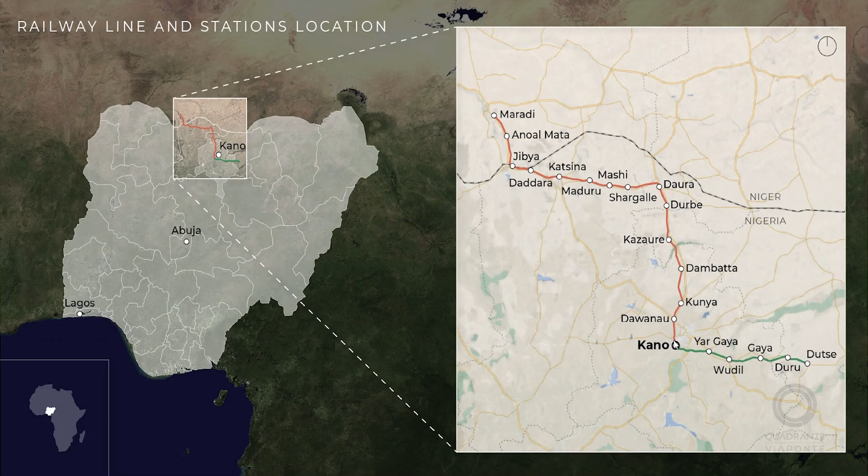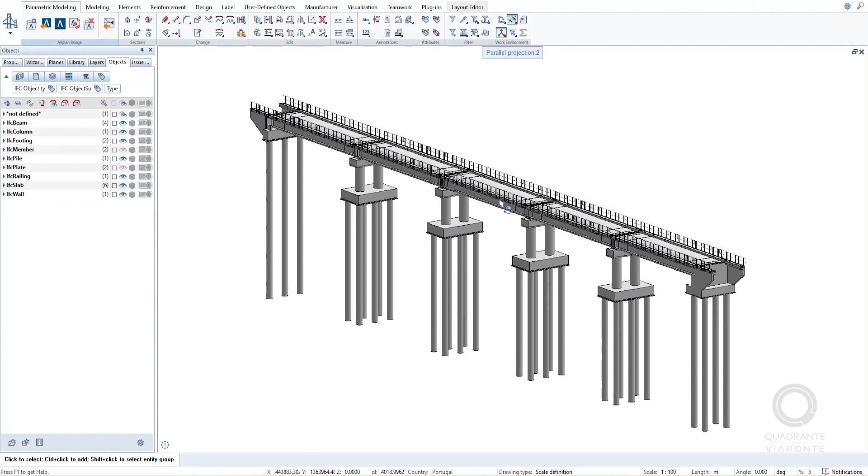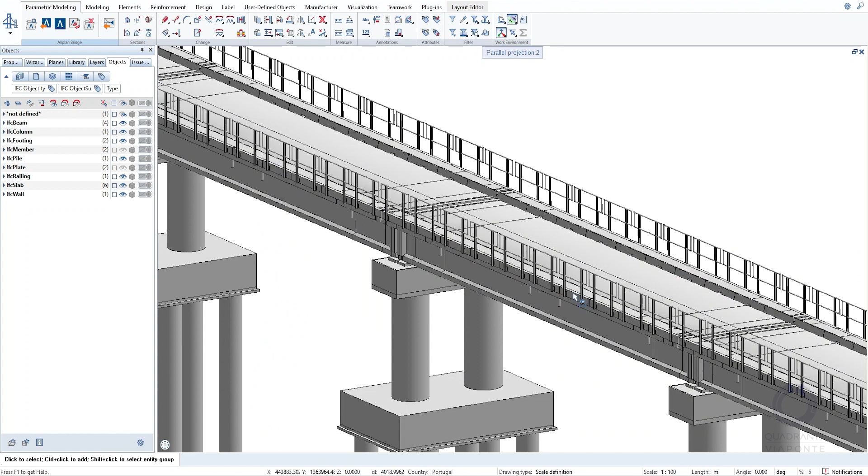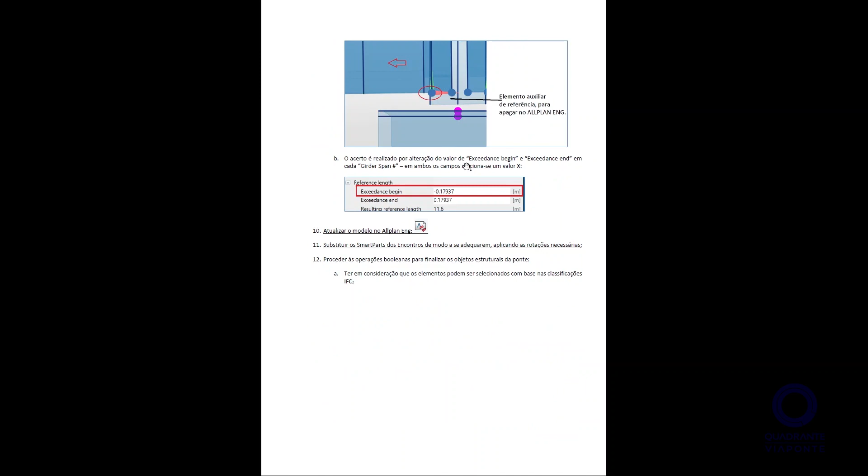In terms of the bridge, we are talking about a girder deck with prefabricated beams with prestressed tendons. The spans are simply supported. The slab deck is concreted over a prefabricated slab. So at the end, the functioning of the deck also comprises the slab, which is explained along a 4 or 5 page manual that allows for the transformation of our template to the final bridge.

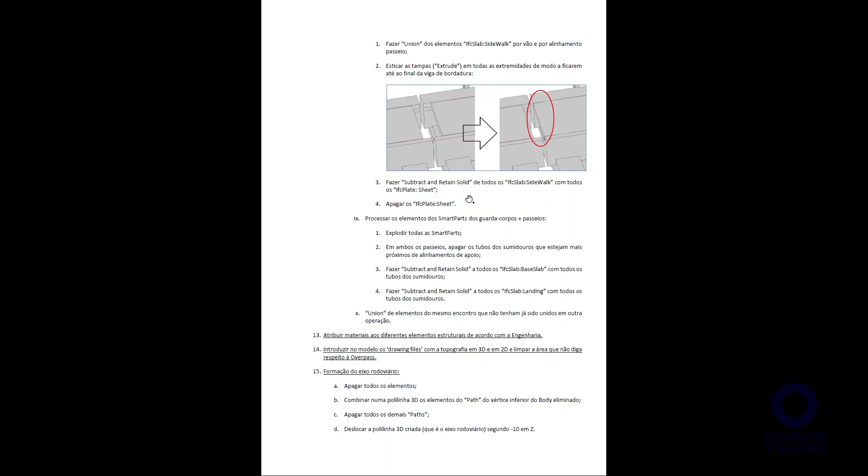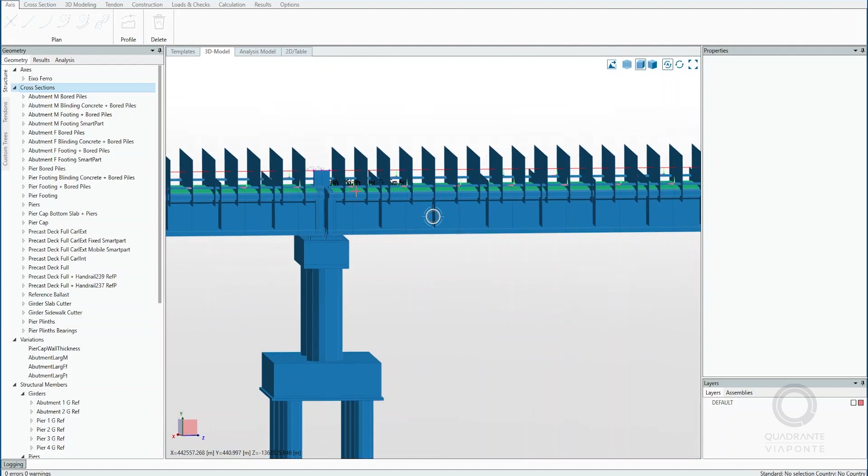So let's go to the bridge and try to look with more detail at how we produce this. When I open Allplan Bridge, what I see is this - this is a finished bridge. Here you can see some elements that were not present in the final Allplan Engineering, these are these vertical laminar elements. These vertical elements are in fact used to produce Boolean operations to construct the joints between the prefabricated slab elements and the elements for the lids on the sidewalks, and that's the reason.

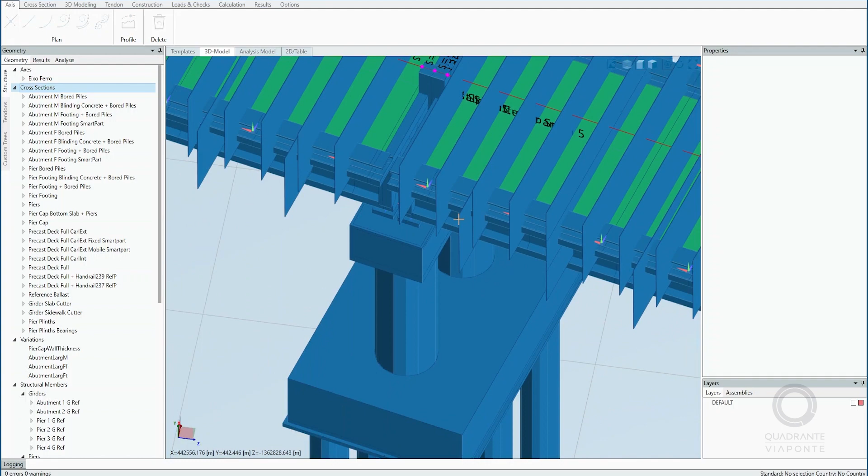Also, we have secondary elements that I will explain in a little bit, but I just wanted to start and clarify why there's a difference in image between this model and the previous one that I showed in the Allplan Engineering.

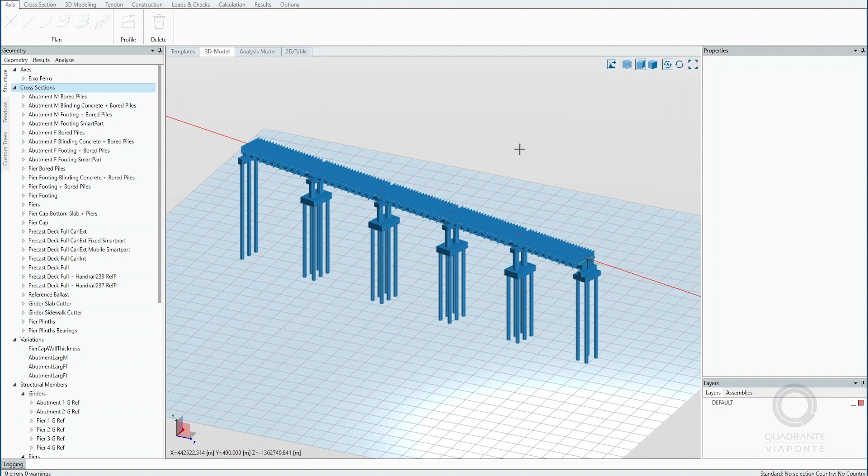The railway axis was imported from BIM Plus using the LandXML, of course, and then we have all the necessary cross sections that were produced, and they are defined in the template that originated this bridge. We need all these reference lines to produce this drawing, this cross section.

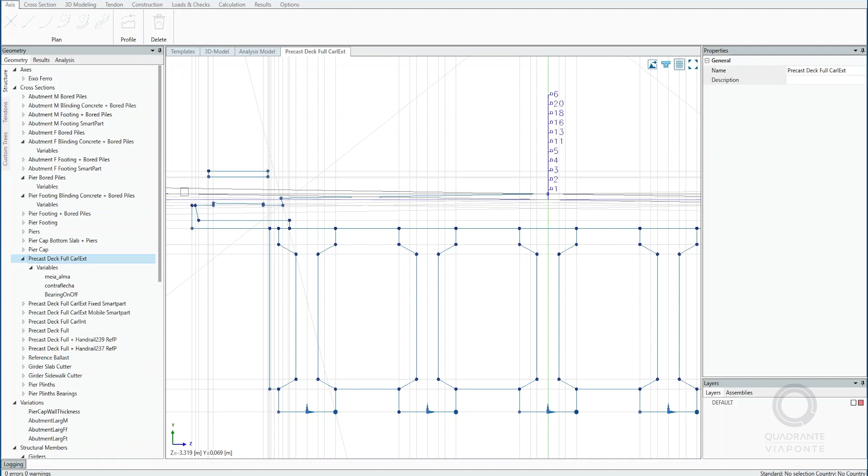We have the lid on the sidewalks, that at the end is scattered by Boolean operations with those laminar elements that we previously saw. We have reference points for the position of the rail for the pedestrians, and also for a small prefabricated element that is positioned here.

We have different cross sections along the deck because of the extremities of the deck, because there is a slight difference of 10, 20, 15 centimeters, and that is modeled. Also, we have a transverse beam at the end of the deck to improve the solidarity of the different prefabricated beams. The difference between the other cross section, it's not complex.

In this case, it's a cross section that is used to position the handrail. Here we can see the reference point. It was not present in the other cross section for the deck.

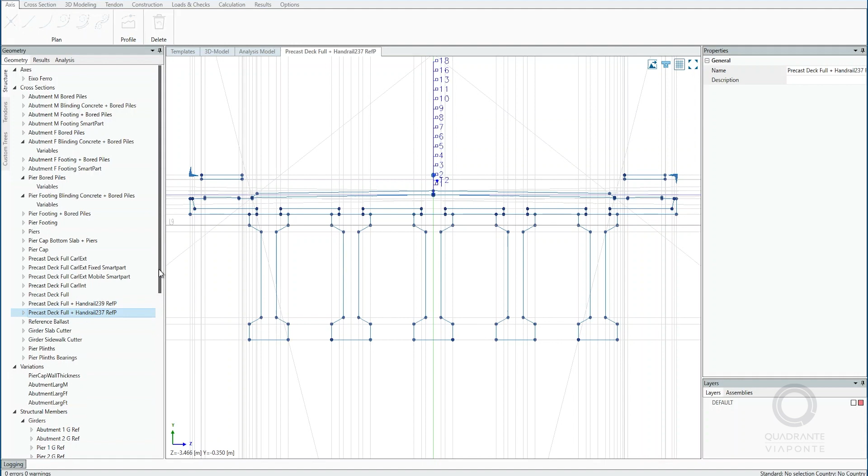There are two different kinds of handrails with different lengths, and so you have to have the two different cross sections. In terms of the 3D model, we have girders, piers, and link girders. The piers, the expected information. There is one pier for each support.

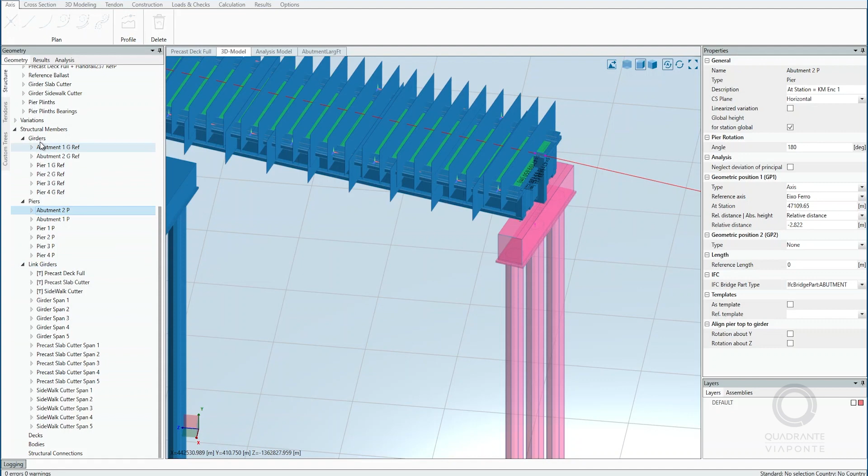The abutments also are produced in this way, and then the other elements of the abutment are introduced by a smart part positioned at a reference point. The deck is in reality produced by link girders, but a link girder has to start at a reference point and end at a reference point. And so the reference points are introduced using girder elements that are connected to the main axis of the bridge.

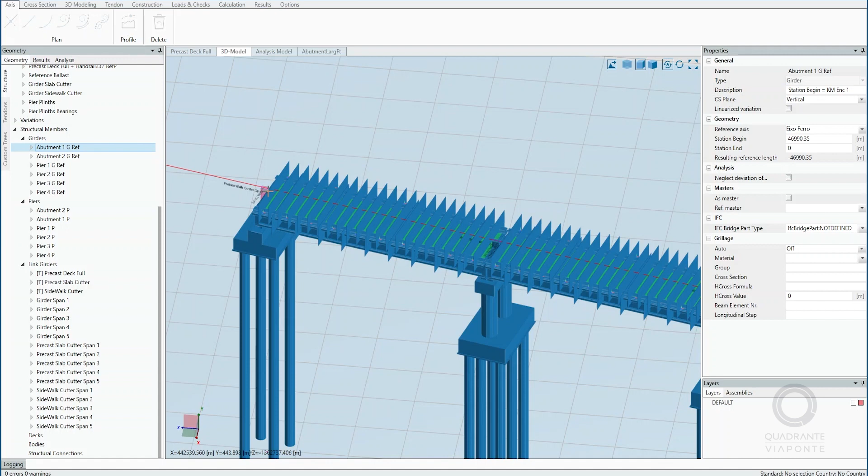So that's this element. This element you use to introduce the start reference point of this span. Then the other element here produces the final reference point for this span and the start point of the second span, and so on. With this, we produce the reference points to introduce the link girders.

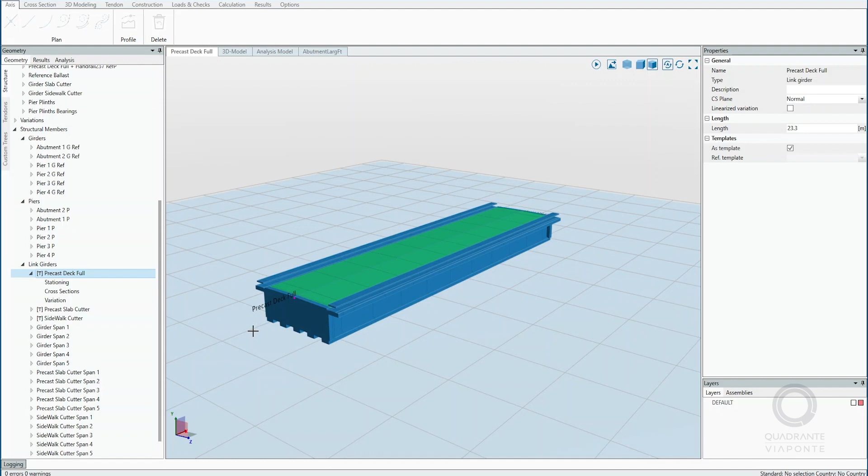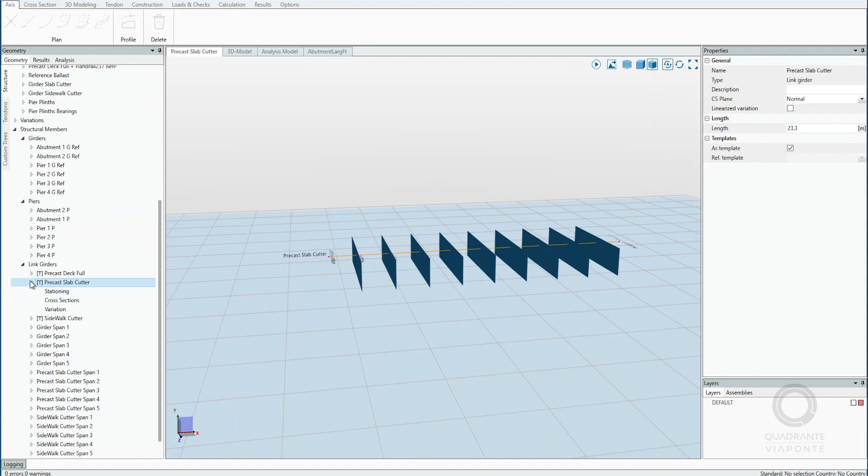We have a template for the precast deck in full with every element, okay? And we also have a link girder for the slab cutters, what we call the laminar elements, to introduce a Boolean operation of 1 centimeter and to create the joints between the prefabricated elements. Okay, and also this one for the sidewalks, the lids of the sidewalks.

With this, at the end, when we are seeing the model, we are talking of 3 independent link girders for each span. It's not complex to implement, especially when we start using, for example, this is a 5-span bridge. Okay, we can even more speedily change this to other kilometers to transform this into another bridge, because it's only a question of changing the kilometers of the piers and of the girders, and everything adapts.

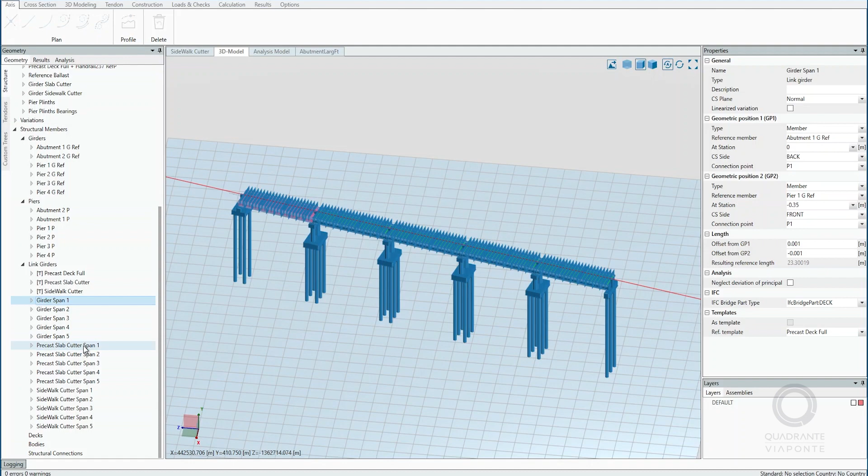So we have the girder for each span, the deck here 1 to 5, and the cutters 1 to 5, and then 1 to 5. There are things that have to be manually adjusted because of the distribution of the girder deck in each span. With this, we produce what we see here, and then from here we extract the 2D drawings for each bridge.

As I said, the process is optimized in order to minimize the specific drawings for each bridge. We have only 3 or 4 general geometry drawings for each bridge that show the bridge in its full length, and the details for the piers and the foundations are from drawings that are uniform for all the bridges, and that have a parameterization in terms of elevation for a foundation, in terms of height for a column, and things like that.

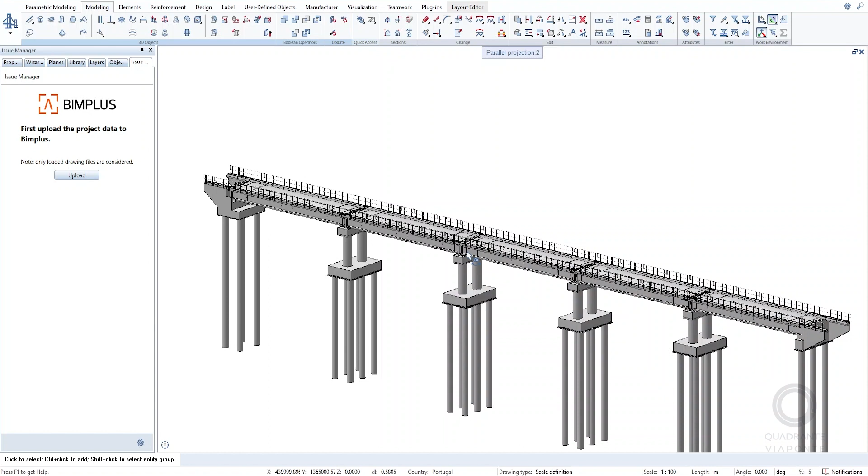Just to finish, I would like to show this 1 kilometer railway bridge. We started doing this bridge using a template with a small number of spans, and then using the addition of the TCL file, we quickly added more spans using the previously defined spans and inserting some lines in the TCL, and at the end we produced this bridge completed and rigorously defined in a matter of 2 hours.

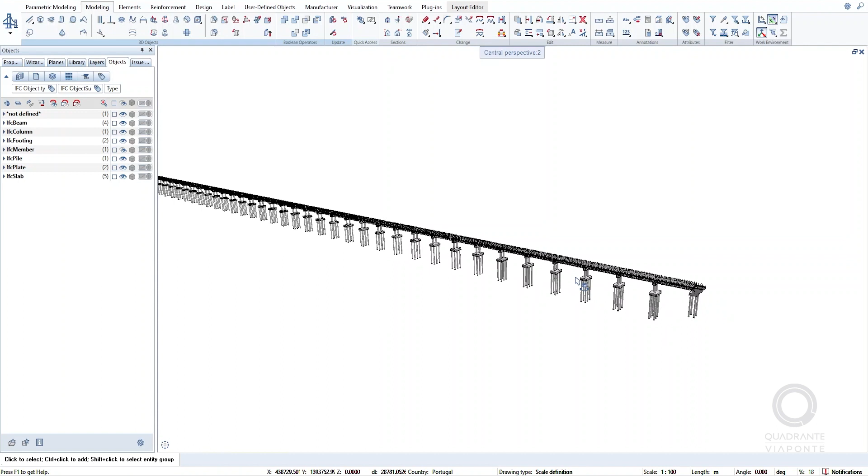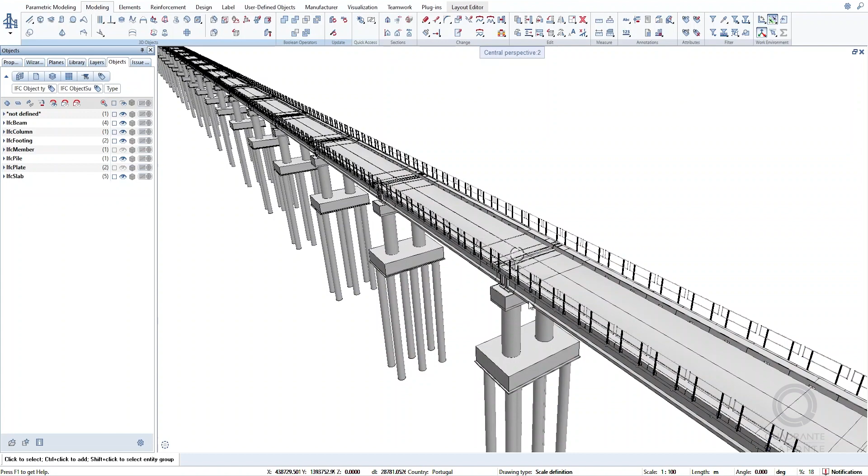We can see here the laminar elements that are used to cut. They can be disconnected because they have a specific IFC classification, and also the other elements we used, the girders we used to implement the reference points for the bridge deck, can be quickly disconnected and hidden. So this is how we produce a railway bridge with 1 kilometer in about 2 hours.

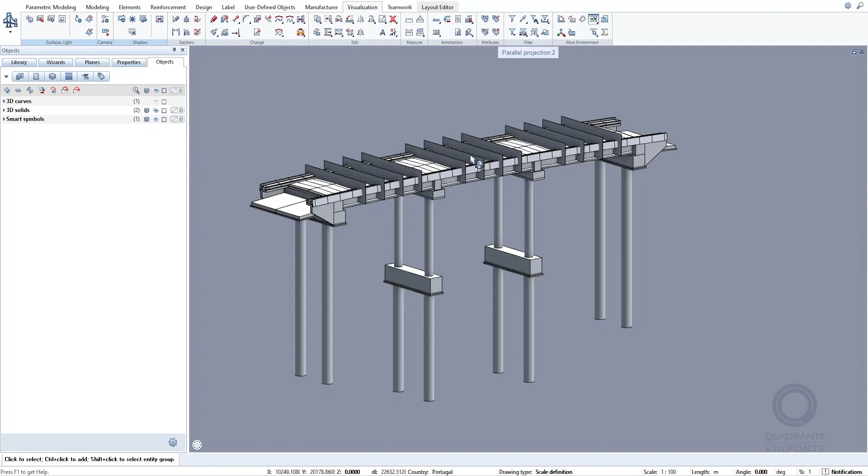I will show you now the overpasses. So this is the template for an overpass. The overpasses are in 95% of the cases with 3 spans. The deck is continuous along the 3 spans and is supported by prefabricated I-shaped beams.

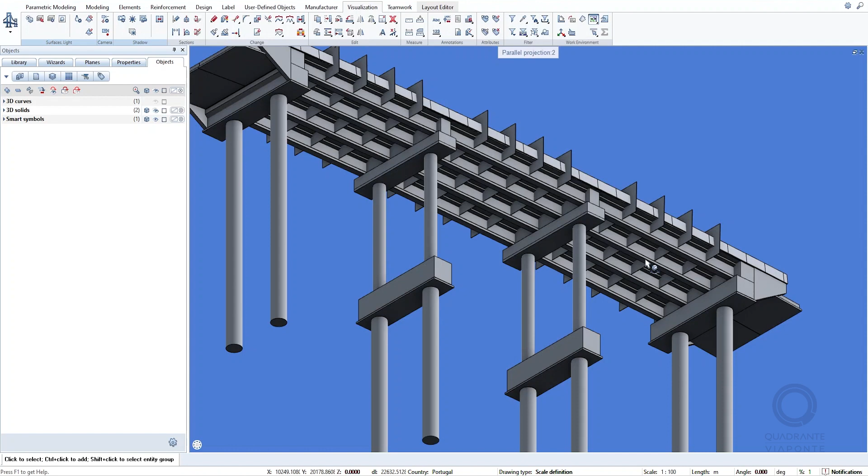There's a prefabricated slab that works as a formwork for the pouring of the concrete of the final slab deck, that allows for an integral functioning of all the elements of the deck. In this case, we don't have bearings. The beams rest directly on the pier caps and on the abutments.

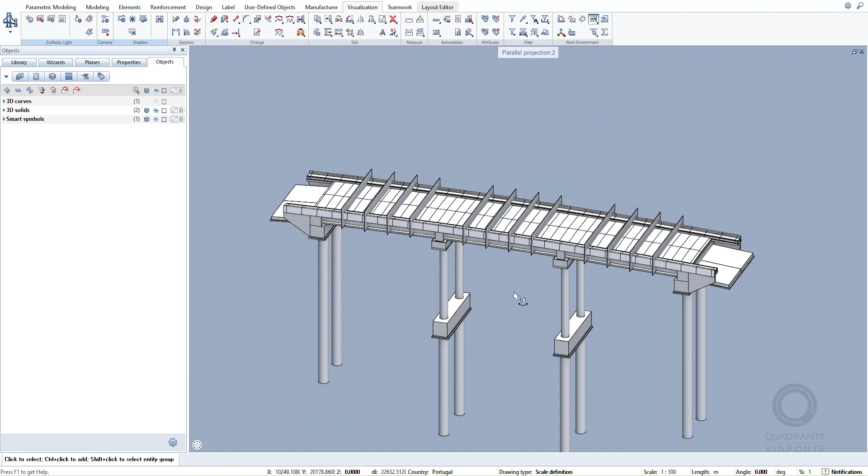Here you can see that the abutments are defined in Allplan Bridge, with the exception of the transition slabs. The transition slabs are smart parts that are positioned using a reference point, and we also can see here the cutter for the prefabricated slabs. In this case, this is the template. The cutter exists, but in a normal overbridge, the cutter after the Boolean operation is eliminated.

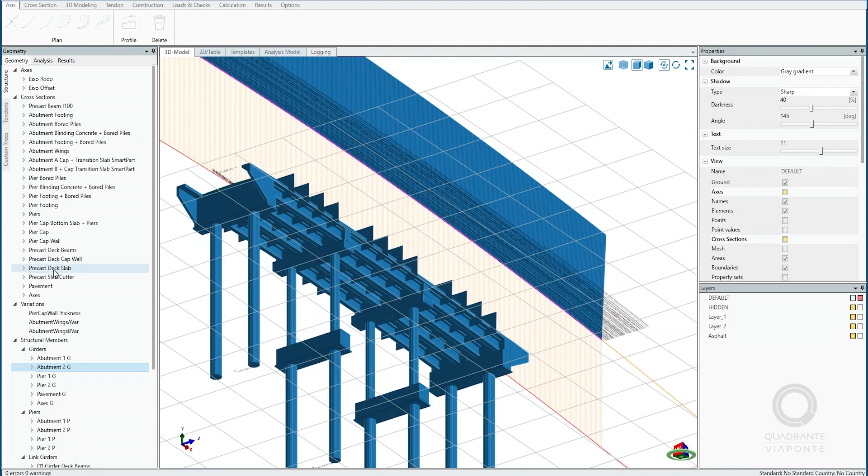So let's go to Allplan Bridge. So we have the road axis, the offset axis, as I explained, all the cross sections. These ones are all simple cross sections with no major complexity. Of course, the deck is a little more complex. In this case, we have a slight variation of the concept of the modeling, because we have to have a round curvature in the surface of the road, and when we were talking about the railway bridge, it was the ballast that had a variable thickness to achieve the circular vertical curves where applicable.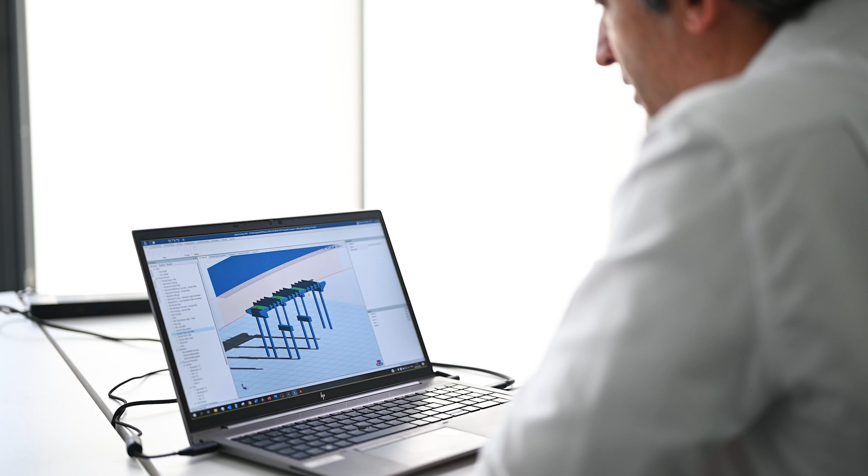When you are working with prefabricated beams, either the depth of the deck slab is variable, or the thickness of the asphalt layer is variable. For the sake of construction efficiency, or in terms of reinforcements, it was considered that the thickness of the deck slab was uniform, and that the vertical curve was achieved by using a variable thickness in the bituminous layer. So at the end we have a Boolean operation between the deck and the asphalt layer, and from that operation, the bituminous layer subtracted from the deck results in variable thickness in the asphalt layer.

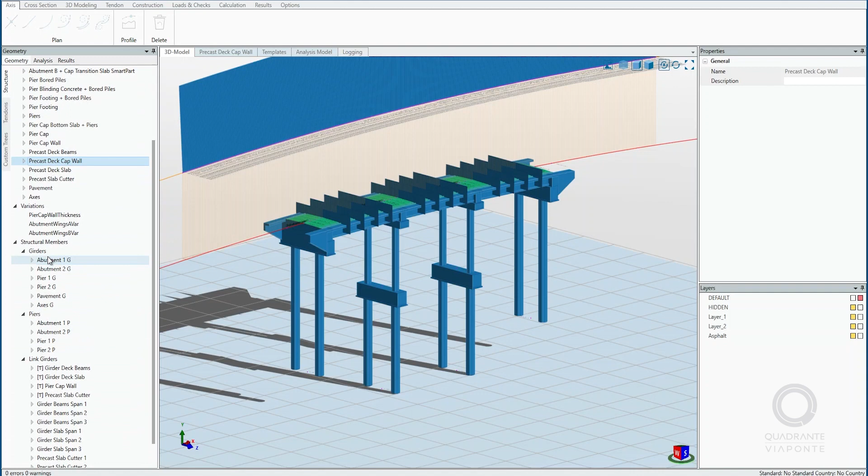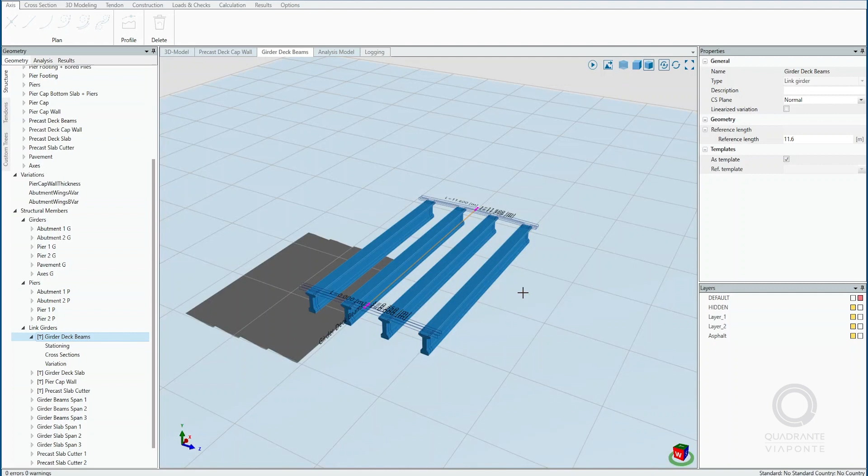We have also the girders. In this case the wings of the abutments are produced here. We also have elements for the introduction and reference points for the girders, the link girders of the deck. And also you have, of course, the piers, the abutments and the central piers as usual. Then we have the girders. At the end there is a girder for the deck beams, a girder for the deck slabs, and also other elements necessary to compose the overbridge.

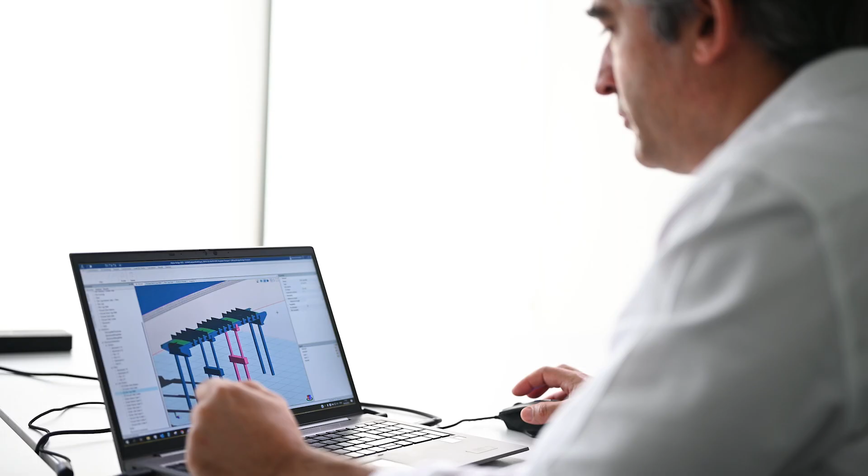The methodology, the workflow is similar, but there's some slight difference because of the inexistence of the bearings, and also because the vertical radii of curvature are much less than in a railway bridge, so the geometric differences imposed by that situation have to be considered and adjusted.

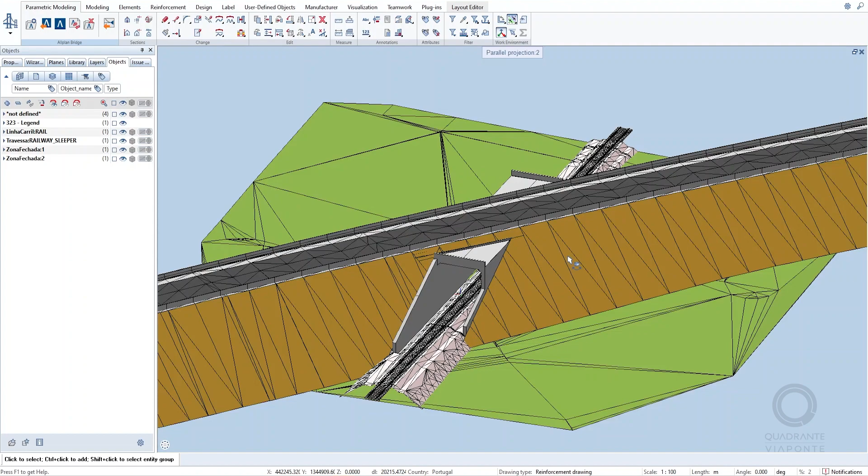Here you can see one of the few underpasses that we have got in all the length of the project. This was also modeled using Allplan Bridge. In this case, for a question of experience and understanding how to do things, we decided to model a stretch of the road and also of the railway for a better visualization and understanding of the solution by the different stakeholders.

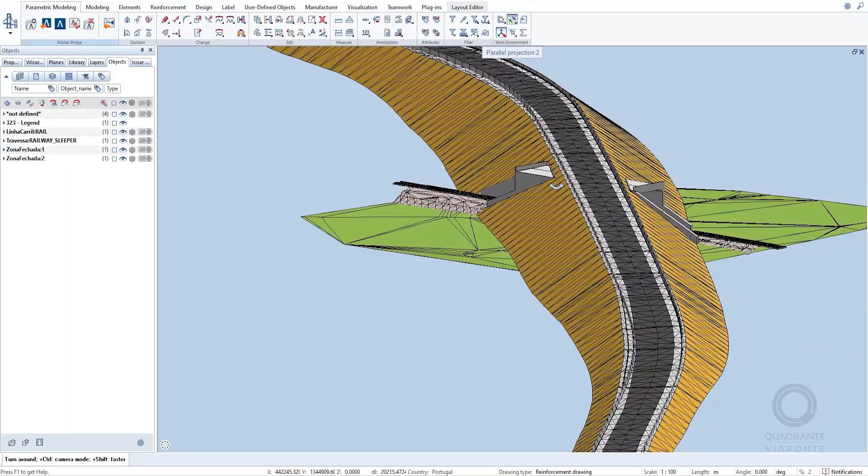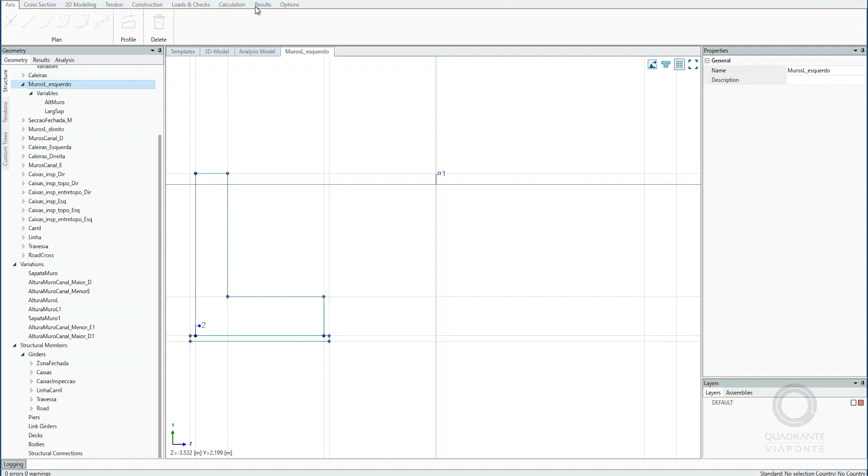At the end, it's a closed frame underpass with a constant geometry. So on the side of Allplan Bridge, what we have modeled is this. This is not complex, so we have a closed cross section and mainly the cross section for the retaining walls, the walls in the extremity without a top slab. So in the end, we got this. We also modeled the New Jersey barrier, rigid barrier here, also the rails and the blocks for the bridge.

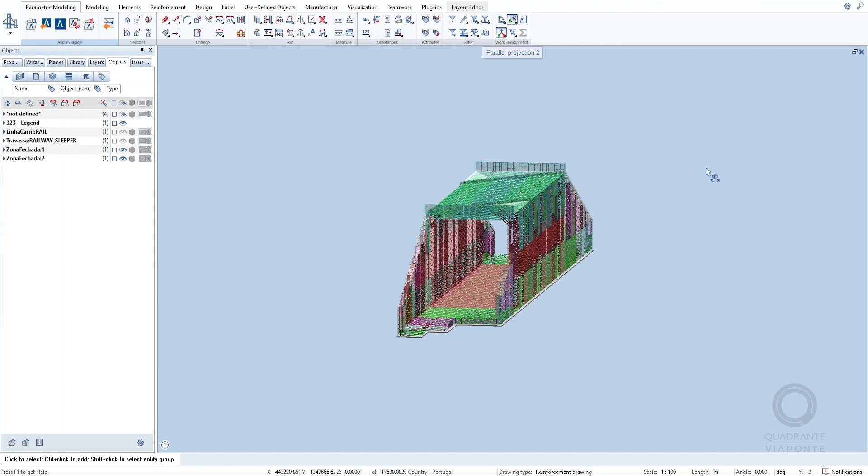Until now we have only seen modeling of geometries, but also in the Nigeria project we have decided to start implementing the modeling of the reinforcements. And so, as in Quadrante we like a big challenge, we decided to make our first reinforcements in this underpass. And so this is the complex result that came from that.

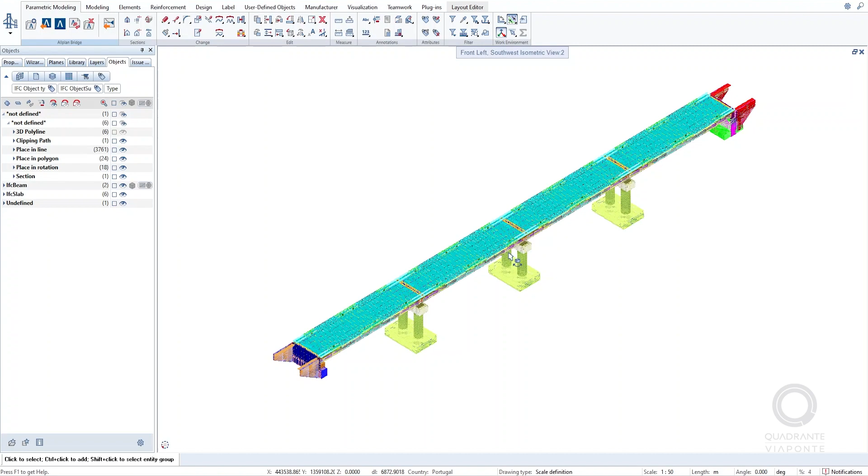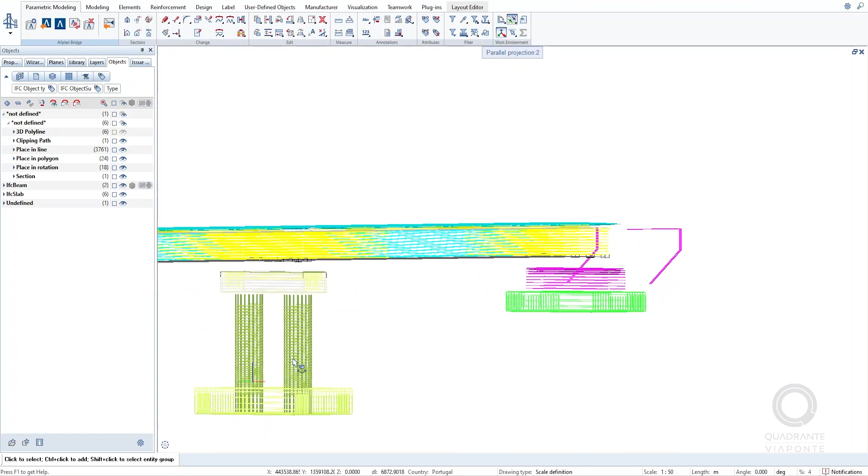Following our first reinforcement challenge, we decided that it was a good idea to model the reinforcement in one of the bridges. And so, element by element, we finally achieved the total modeling of the reinforcement of one bridge that is used for the other bridges. This is a heavy model. We have the reinforcements of the abutments, the prefabricated beams and the deck slab, the pier cap, the columns and the foundations. Only one element is lacking the reinforcement, it's the piles. We are working on that. I believe that by next year we will achieve the reinforcement for the piles.